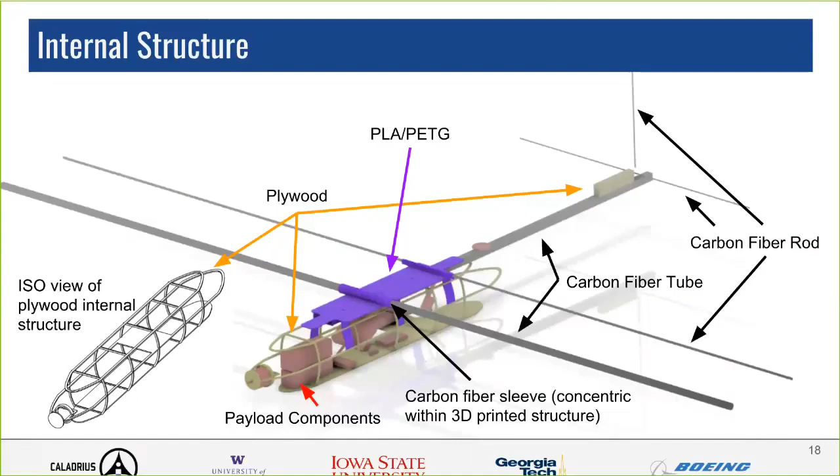Well, that was fast.

Hey guys, just doing a mic check for Team 6 here. This is Richard, can everybody hear me? Loud and clear, thanks Phil. Hi everyone, this is Tom Flipson from the University of Washington, I'd also like to do a mic check, can everyone hear me? Yep. All right, people can hear Iowa State. Can you see our presentation? You are a little quieter than the other two, but we can see your presentation just fine. Is this better? We're going. Yeah, that's great, thank you.

Good morning everyone, we are Team 6, MARTI, and this is our critical design review.

We'll start by going over our mission statement, examining the mission stakeholders and the description of the mission, as well as some of the parameters we've designed. Our UAV, MARTI McFly, will be flying into extreme storms to collect weather data in order to improve tornado prediction. We'll be doing this using dropsondes that the National Center for Atmospheric Research has graciously donated to our cause.

Some of the stakeholders for our mission are Dr. Robin Tanamachi from Purdue. She's a professor in the Department of Earth Sciences and researches severe storms and tornadoes, and has been instrumental in helping us determine the types of conditions we'll be flying in. We've also been working with Dr. Holger Vömel and Dr. Terry Hock from NCAR, scientists who operate and design the dropsondes to collect the data and then analyze the results.

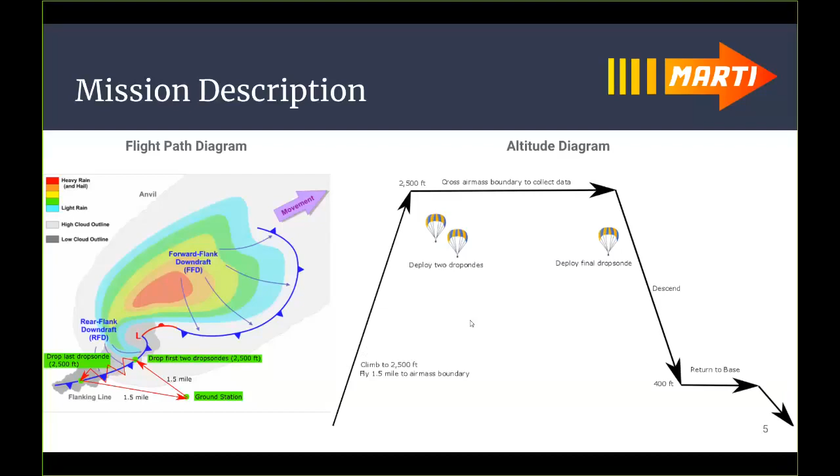Our altitude diagram shows that we'll be ascending to about 2,500 feet as we approach the storm. Once we enter the storm front, we'll be dropping the first 2 dropsondes, crossing the air mass to collect data with the last dropsonde. Once we exit the storm front, we'll drop that final dropsonde, descend to 400 feet, and return to base.

Some of the parameters and requirements we've come up with are that our UAV shall fly about an 8-mile range. It'll cruise at 67 miles an hour with dash speeds of 88 miles an hour, reach 2,500 feet above ground level for max altitude, be able to carry and deploy the 3 dropsondes you see at the bottom, and tolerate any gusts, hail, and water it might encounter in the storm. Finally, it will be hand launchable.

Some of our design overview features: we have removable wings for easy transport, since this will be traveling with storm chasers. We have a cantilevered tail boom for structural support, and our components tray, which holds all of our interior components, is fixed to that boom. Our dropsonde deployment feature sits on the bottom of the fuselage and is able to deploy the dropsondes NCAR has gifted us, which you see on the bottom right. These are operational and will be able to transmit data to us.

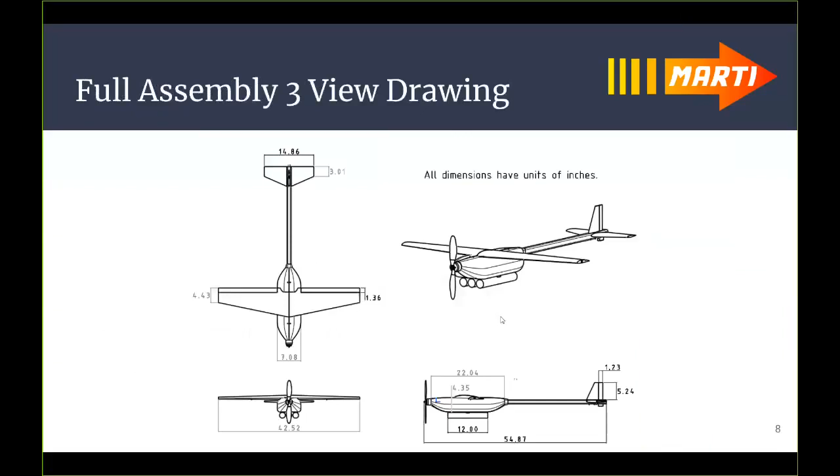This is our full assembly. All of the units here are in inches, and you see that we have about a 3.5-foot wingspan and about 4.5 feet from nose to tail.

Team work breakdown is pretty similar to PDR, although a couple things have changed. Pengwei is still our coach here at Iowa State. Brenton and Steven are our program managers and chief engineers. Anwar is also assisting, and our team has expanded to include 6 sub-teams now. We've added a payload team, and the students have been redistributed accordingly.

So now I'll transfer it over to Tom and Marcello at University of Washington to discuss propulsion.

Good morning everyone, my name is Tom Flipson, and I'm a student at the University of Washington. Today I'm going to discuss with you our propulsion design requirements, our design selections and performance for propulsion, and the subsystem validation and testing.

The propulsion design requirements for our system: we must provide enough thrust to overcome the drag the aircraft will be subjected to at 67 miles an hour of cruise, with surplus thrust available to overcome drag at 88 miles an hour for a short duration.

Our battery system must also provide enough energy to allow the aircraft to fly a mission range of 8 miles. The estimates of this requirement will be validated by measuring power consumption at various dynamic pressures. On the right, we've written validation of those requirements: our propulsion system must provide particular amounts of thrust at dynamic pressures corresponding to 67 miles an hour and 88 miles an hour, as well as provide 8 pounds of static thrust. We'll also be checking the power requirements.

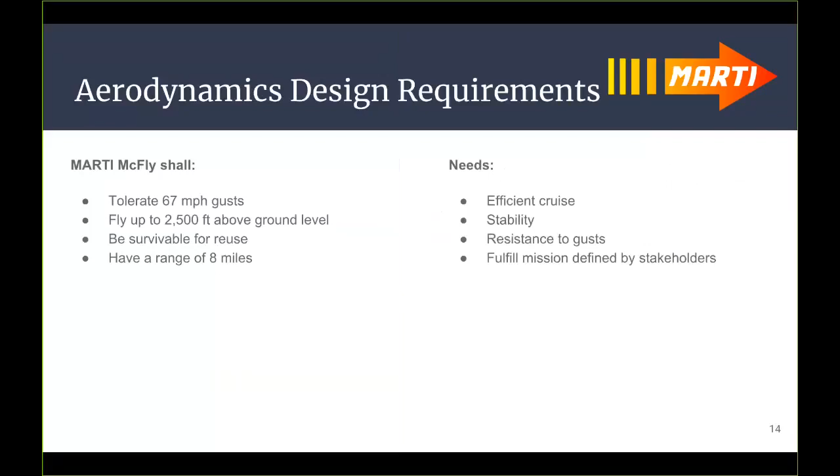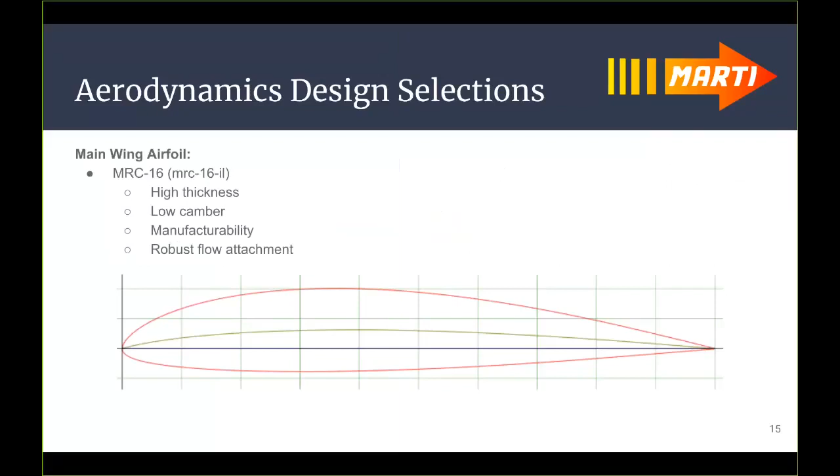The next few slides are our wing selections. For the main wing, we went with an MRC-16. The high thickness allows for sufficient lift and to embed our servos, while the low camber provides an acceptable pressure gradient to keep flow attached.

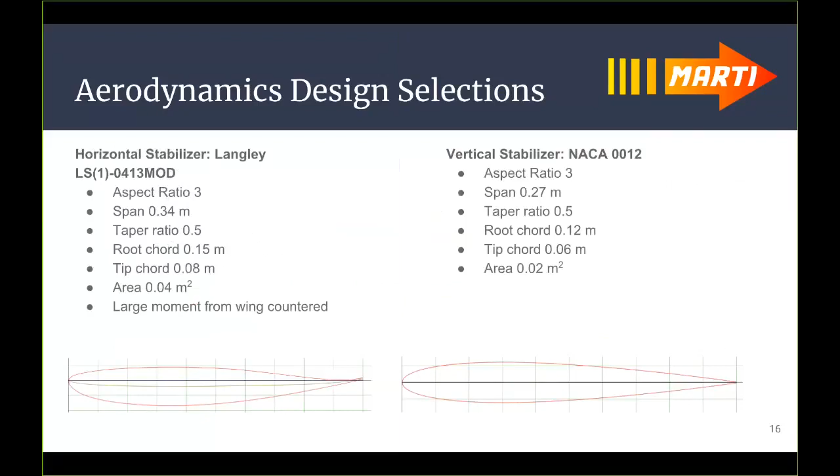These two airfoils shown are the vertical and horizontal stabilizers. What's important to take out of this is that since we have a large moment from our main wing, we needed to size the airfoils in the rear of the aircraft to counteract that.

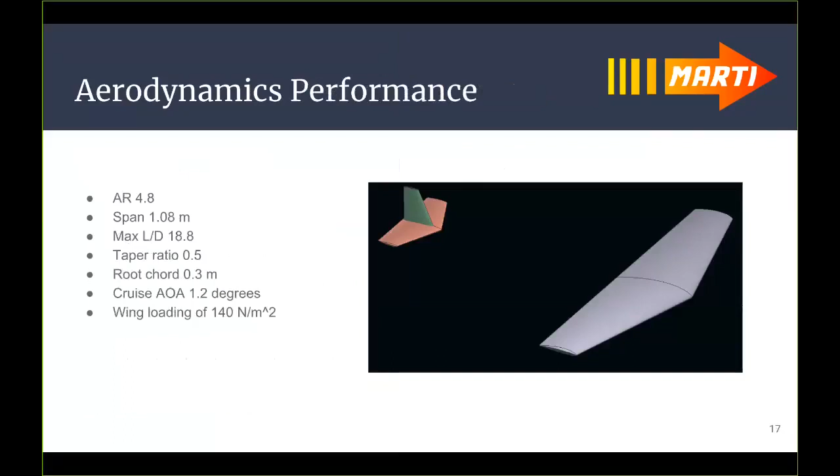For performance, we're going to be mounting at a 1.2 degree incidence angle, and we're expecting a wing loading of 140 newtons per meter squared during cruise, with a max load of 12 Gs beyond that.

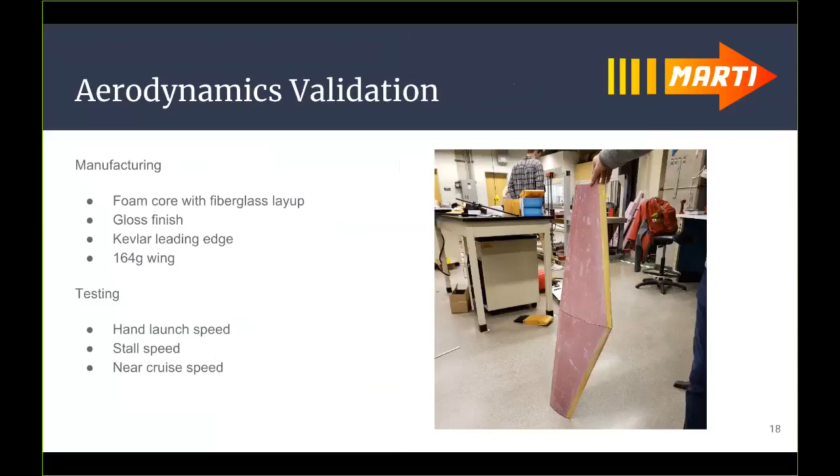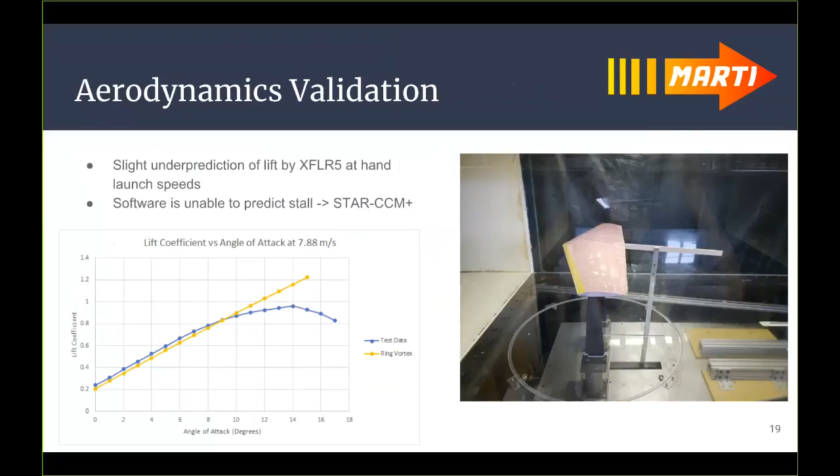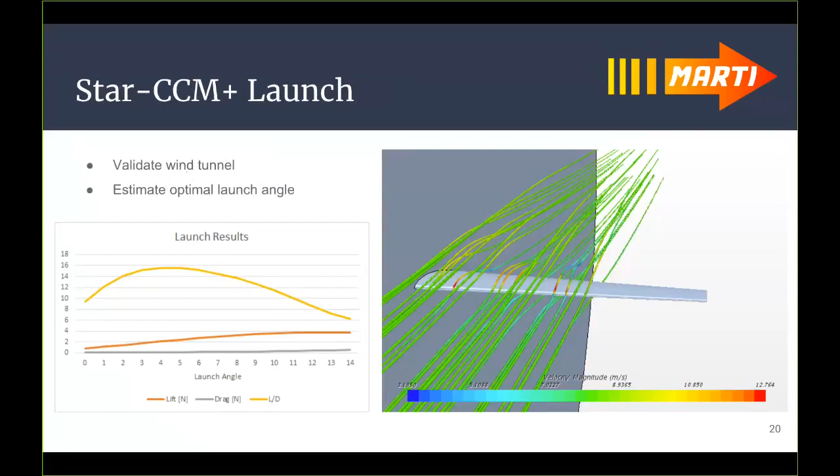Since we were confident and satisfied with how our wind tunnel data matched up with our software validation, we're going to use Star-CCM to validate our cruise configuration. This will allow us to save time without having to go to the wind tunnel, and to change our angle of incidence much easier to hone in on the appropriate value.

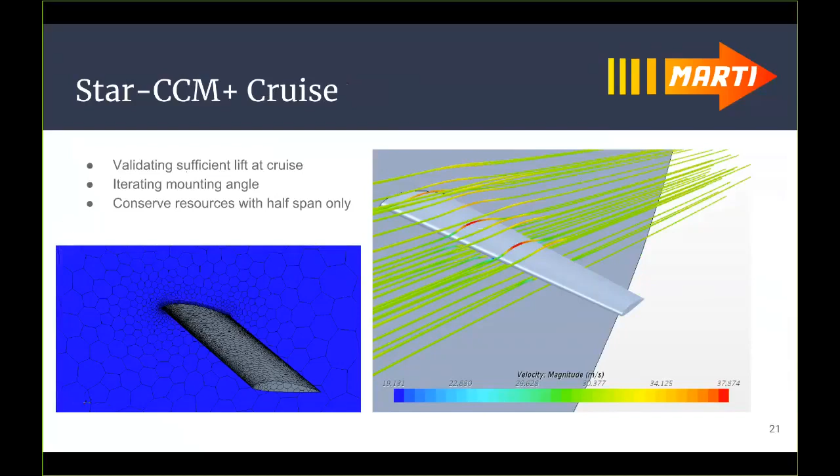The next few slides are our control selections, and again, we'll go over design requirements, selections, performance, and our validation plan.

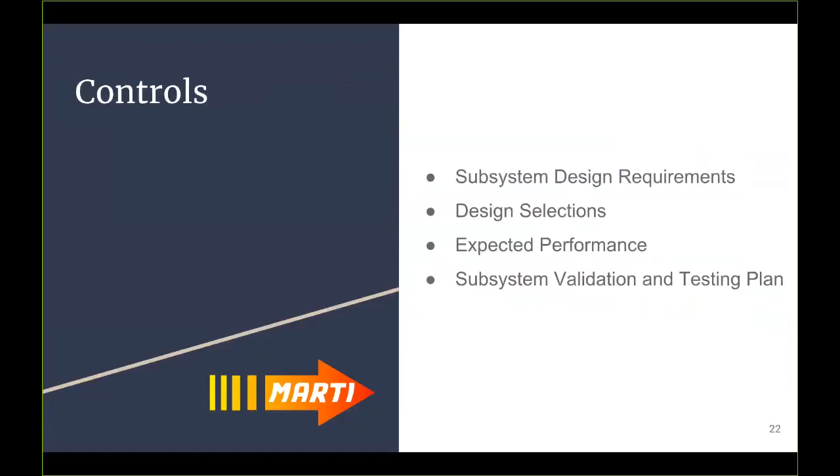So for an aircraft that's going to be flying near tornadoes, we need high stability and control authority. It needs to be durable. We need to be able to operate in varying speeds, which is the cruise and dash speeds we talked about earlier, and we need extra lift for takeoff.

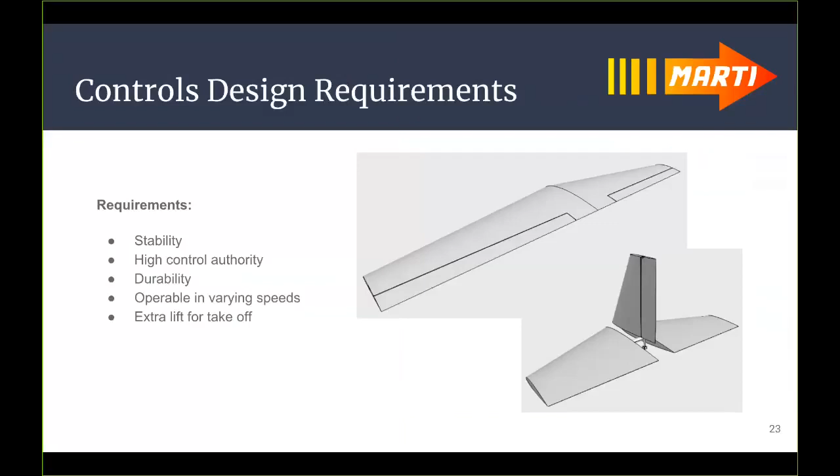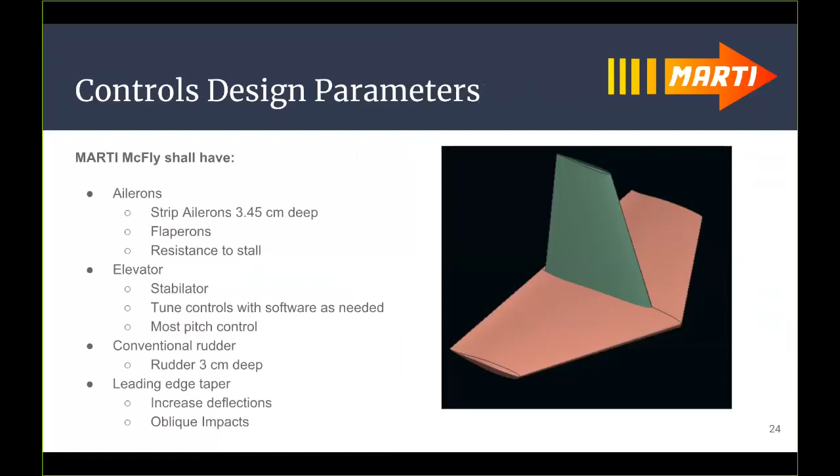So to achieve that, for high control authority, we're going to be using strip ailerons, which run the length of the wing. We're going to have a flaperon configuration so that we can improve our stall speed. The elevator is going to be a stabilator to counteract the large moment from our main wing. And we're going with a conventional rudder with a leading edge taper.

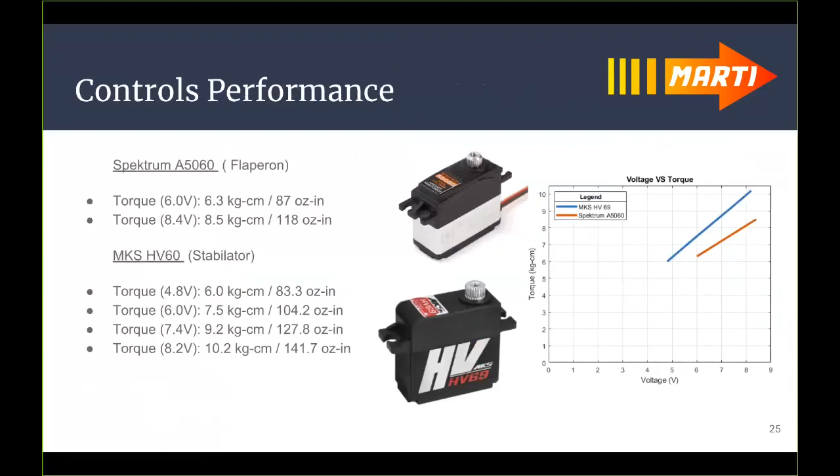Because we are expecting high loads on our wing surfaces, we're going with high torque servos. For the flaperon, we're using 2 Spektrum A5060s, and for the stabilator, we're going with the MKS HV60. The graph on the right just shows what our expected torque is going to be per applied voltage.

And I'm going to pass it over to Richard to talk about structures.

Yeah, thanks, Marcel. As I said, my name is Richard. I'm going to cover the structures stuff for you today, and then a little bit on how everything's going to integrate. So for structures, we're going to talk about the requirements again, the selections we made, and then some validation analysis of that.

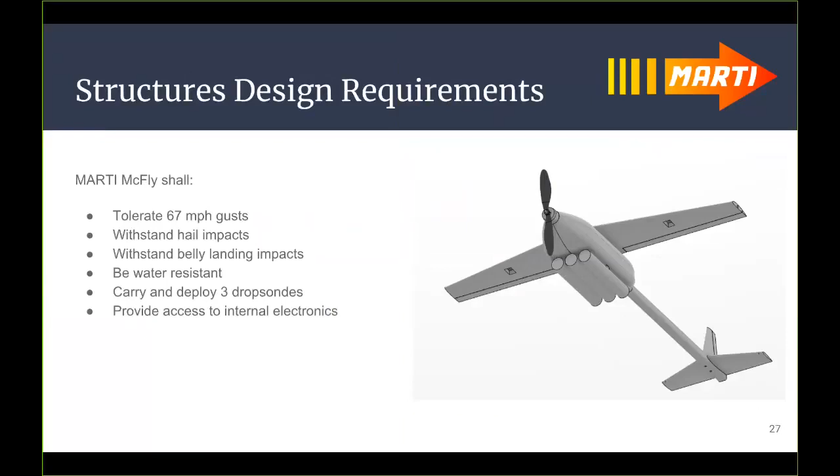The requirements were: we need to tolerate 67 mile per hour gusts, that's about 30 meters per second. We need to withstand hail impacts — obviously, if we're going into these big storms, that's a concern. We need to be able to withstand belly landing impacts, that's how we plan to get to the ground. Be water resistant, obviously to rain. Carry and deploy 3 dropsondes, that's the payload we talked about. And then to provide access to the internal electronics, if we're hot swapping batteries, we have to have reasonably easy access to get in there.

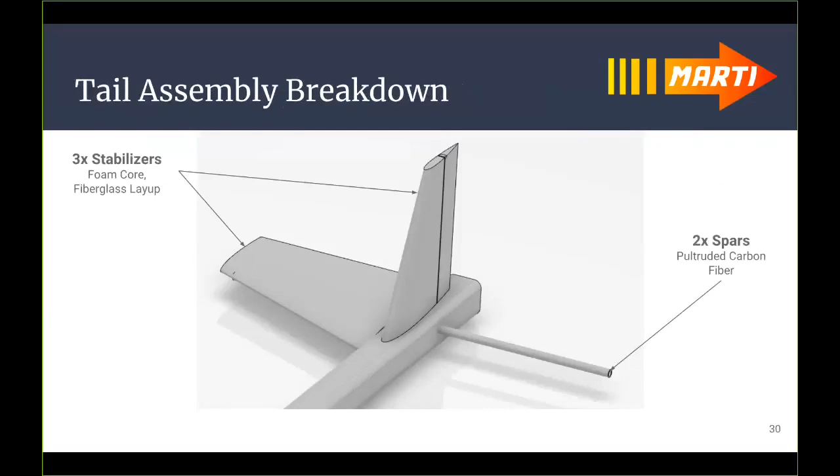Tail assembly in similar fashion. We have the stabilator, has a spar going through on either side, and then the vertical stabilizer. These are all once again going to be foam core construction, and then with a fiberglass or carbon fiber layup on top.

A little bit of systems integration, so just how all the components are going to work with each other, and then a talk on some power systems or other electronic systems components and the power budget for those.

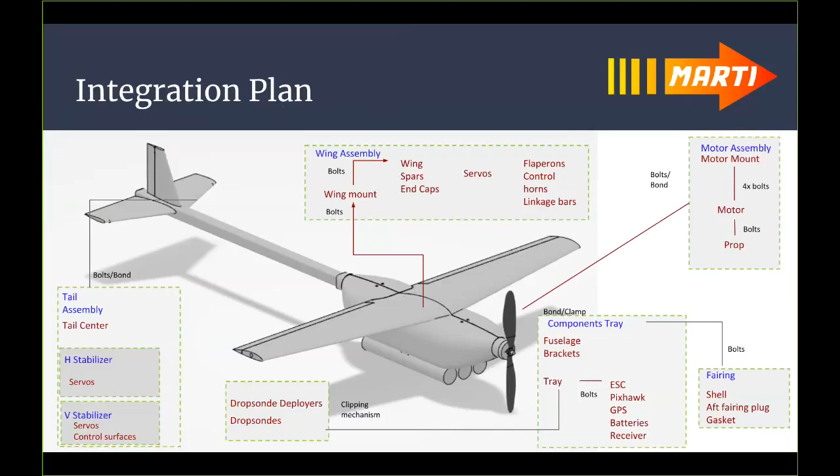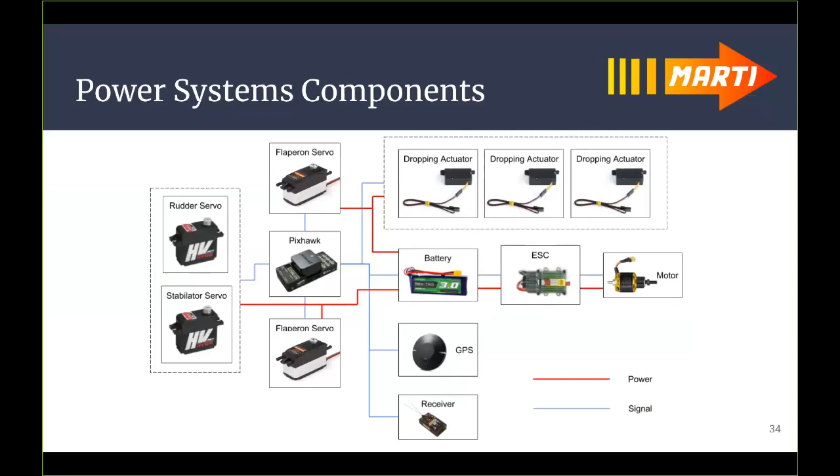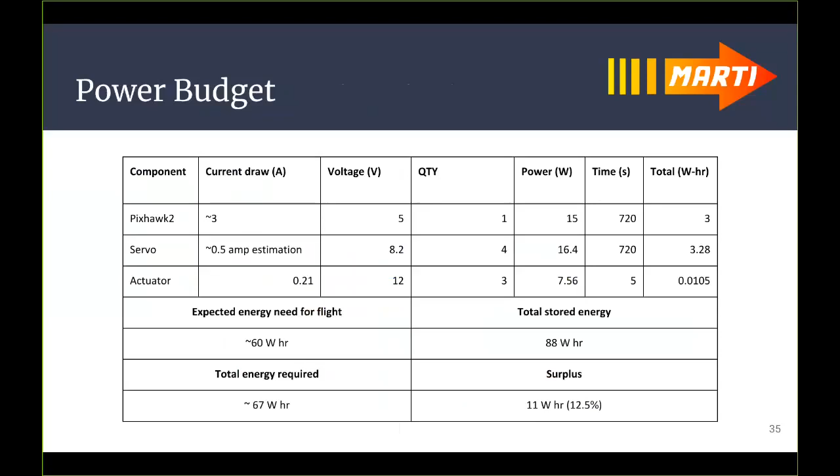All right, I'm now going to pass it over to Becca to talk about further validation.

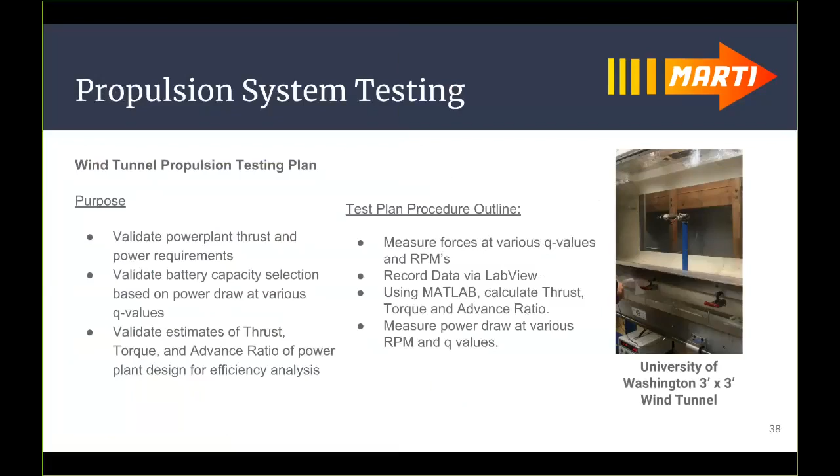For flight tests, we have 4 weeks of flight testing planned. The first week we'll be investigating glide, stall, and cruise conditions for the aircraft. Week 2 we'll move into investigating dash velocity, climb rate, and then range and endurance for the aircraft. Week 3 we'll be looking at payload deployment, both high speed and slow speed deployment based on the various flight conditions we might encounter. And then week 4, our contingency testing, we'll be looking at loss of signal as well as full control deployments.

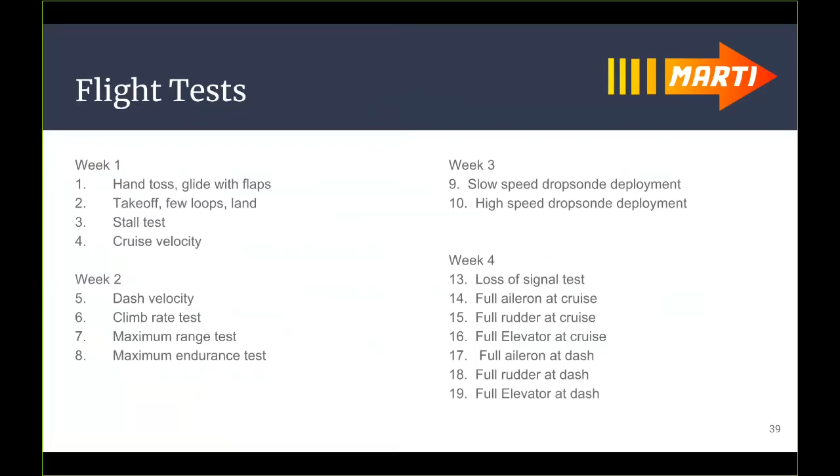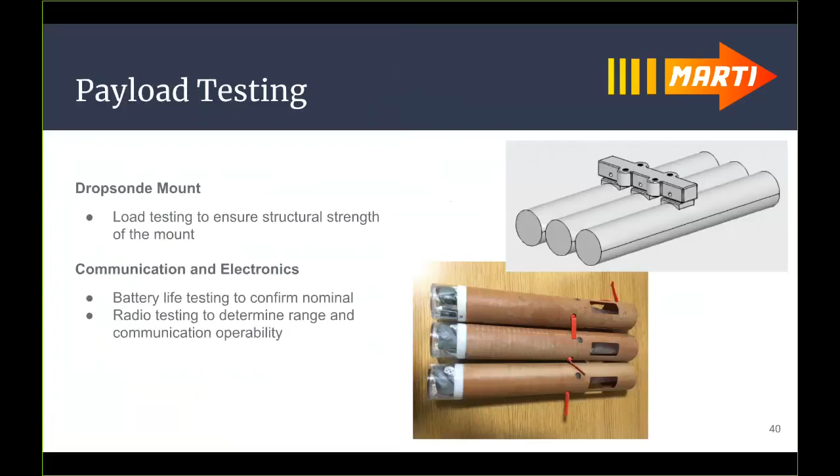For our payload testing, we'll be doing structural integrity testing on that dropsonde mount that you see in the top right, so we'll make sure that can withstand any kind of loading it might encounter during flight. And then we'll also be looking at battery life and radio range for the dropsondes you see below. These have internal batteries, so we'll just be making sure those have the life to last for the whole flight.

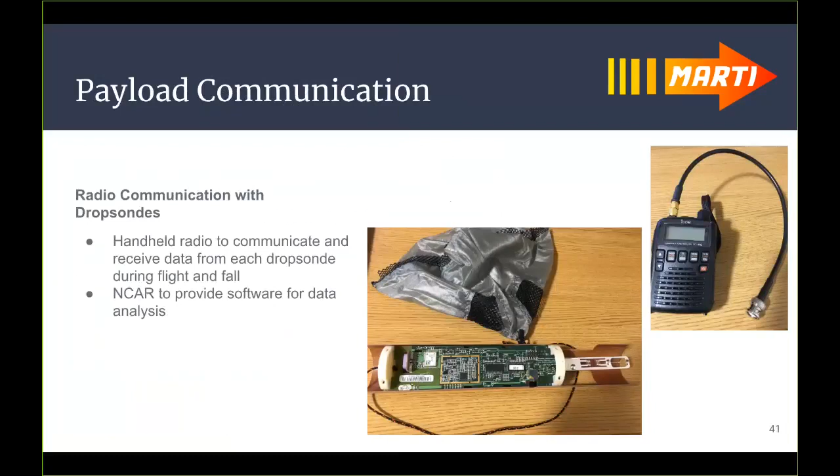For payload communication, each dropsonde is connected to one of these handheld radios that will be receiving data, and we'll be working with NCAR to help us put those in communication, and then also with software providing for that data analysis. And I'm going to give it over to Brenton to talk about manufacturing.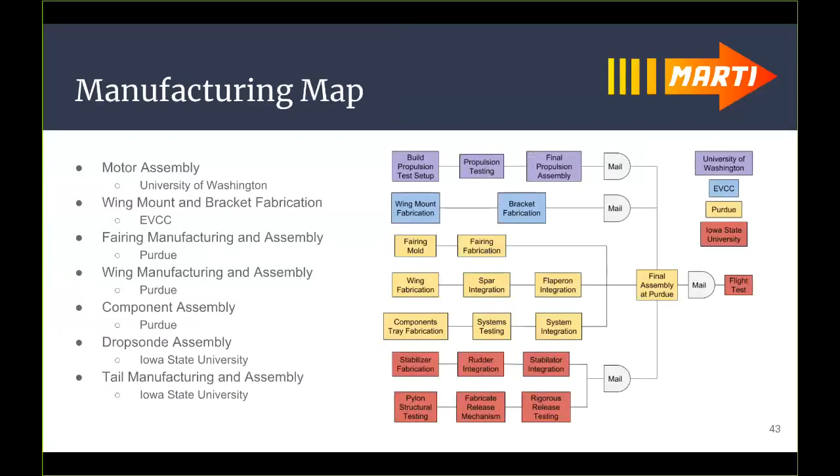For our manufacturing sample plan, this is just an example of our bracket used to hook the tray to the tail boom. You can see we've outlined where it's going to be sent, the cost, possible materials, tools required, 3-view drawings that can be given to the manufacturer for fabrication, as well as a procedure for how to use it and the intended use.

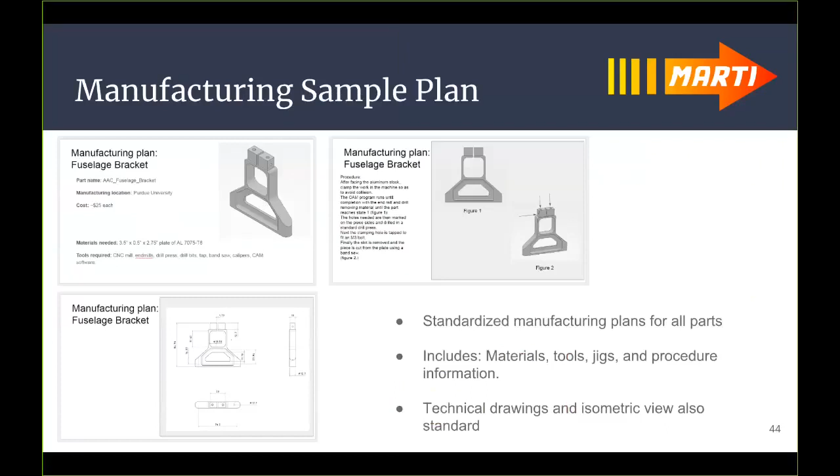For jigs and tooling, throughout this process we'll be using quite a few different fabrication tools. At Iowa State, when we produce wings or our tail assembly, we do it using Mastercam and a CNC. In the image it shows creating a negative mold for the underside of the wing section so that we can correctly CNC the top part. We will also be using 3D printing.

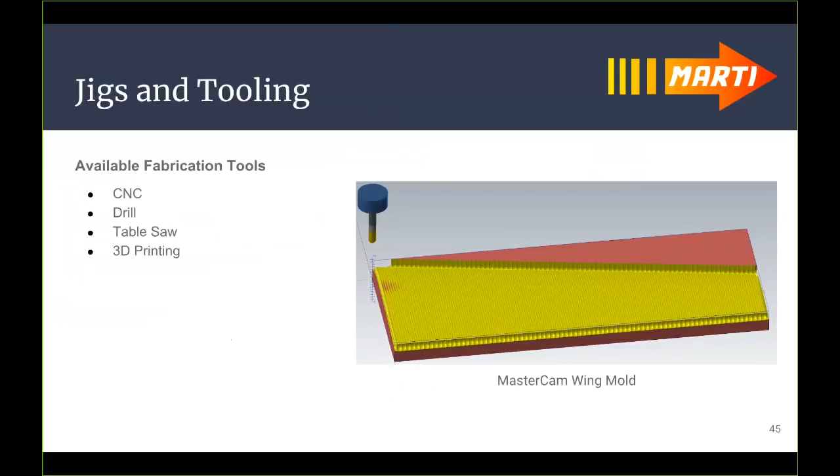So for the manufacturing timeline, I'd like to draw attention to the legend. The building time takes place in the black areas, the shipping time takes place in the gray area, and the testing in the yellow. For example, the dropsonde assembly will be testing some of our components and then building our final assembly before testing it again and making sure everything works well before shipping it off to the main assembly.

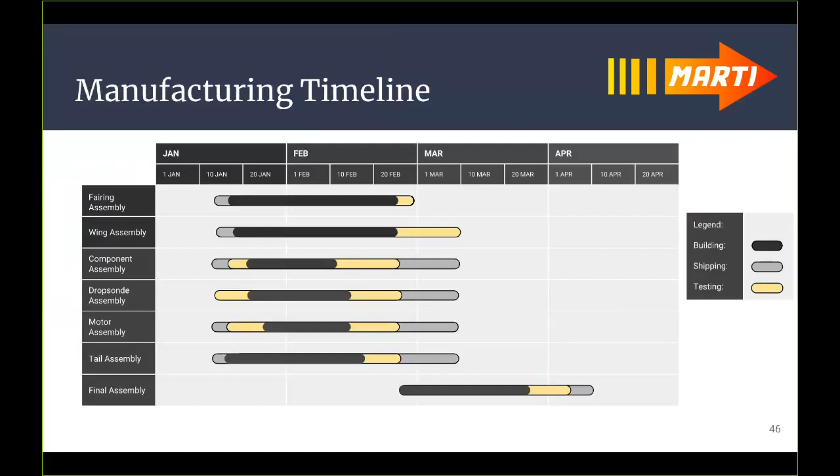Throughout this, we have our project management. We'll be outlining our updated budget as well as the Phase D schedule.

So for budget, as you can see from the pie chart, we still have quite a bit of a remainder left over. Our total project cost is about $3,878. We have accounted for the shipping expenses in there. Our payload is a very small amount of our overall budget due to the generosity of NCAR providing the dropsondes. We won't actually have to purchase those.

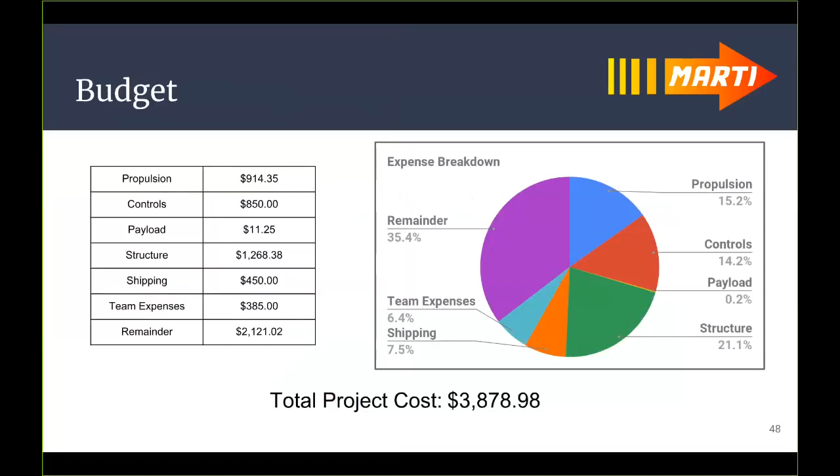So for the Phase D schedule, this is just kind of to go hand in hand with the manufacturing plan. As you can see, all of the fabrication and testing are integrated here, as well as some other things that don't fit directly into the manufacturing plan.

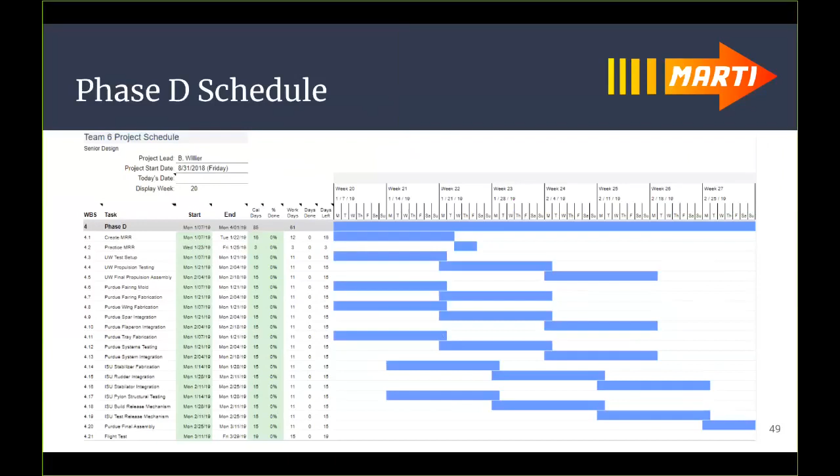So thank you for listening, and we'll open up for questions.

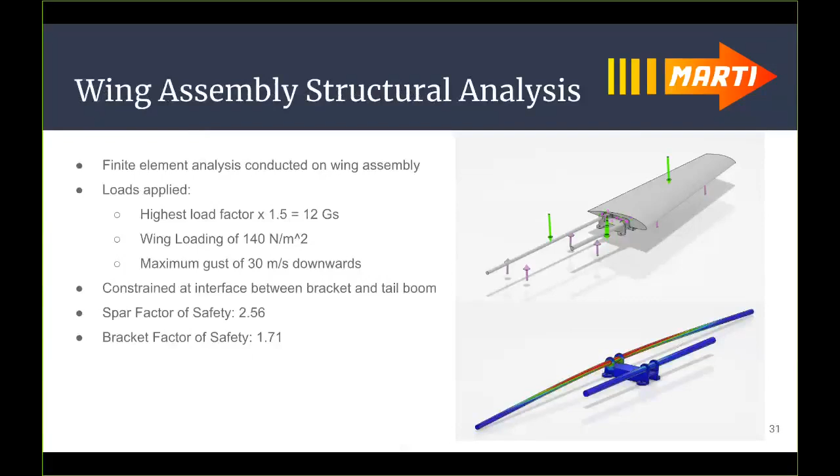Looking at your attachment brackets between the tail boom and the wing mount. I'm not sure exactly which slide that is. You scroll back where you're showing the fuselage attachment, wing attachment to the fuselage. Kind of an image of the one you're referring to? Yeah, if you go further up, there is a better one. Yeah, you just passed it.

Okay, that one. For the intents and purposes of this model, this is an adequate design, it provides you flexibility and adjustments. However, if you would design a wing to fuselage joint like this in Boeing, you would receive a lot of constructive criticism. Generally, you're trying to avoid putting your bolts in tension. Your fasteners are way more efficient if they're loaded in shear. So this is something to consider, just a word of advice.

Excellent, thank you for that. Yeah, we'll work on the right thing. I think it will do just fine for what you need, but what I'm saying is this is just looking forward.

One other thing is you have pultruded carbon fiber spars. I would consider putting a very thin wall metal sleeve in the areas where the parting plane is between your fuselage attachment and the wing, and the same at your tail, horizontal tail attachment to the fuselage. As I mentioned before, carbon fiber doesn't like to be point loaded transverse to the fiber direction. It's pretty sensitive to that out-of-plane loading, so you may want to have something to protect that immediate area.

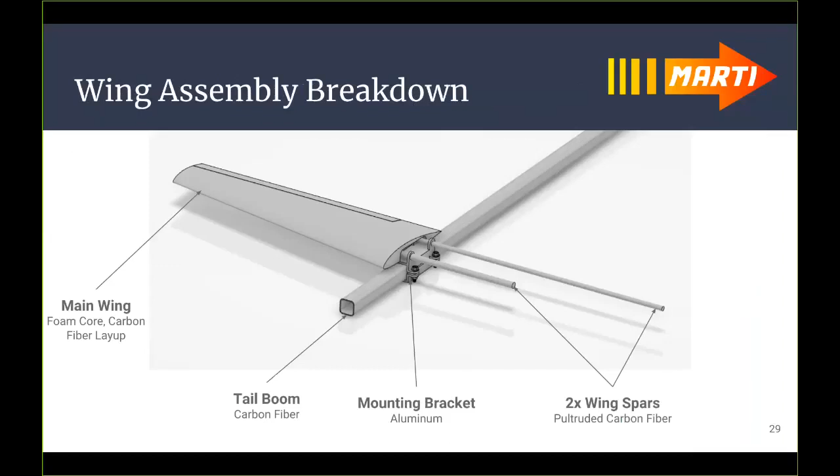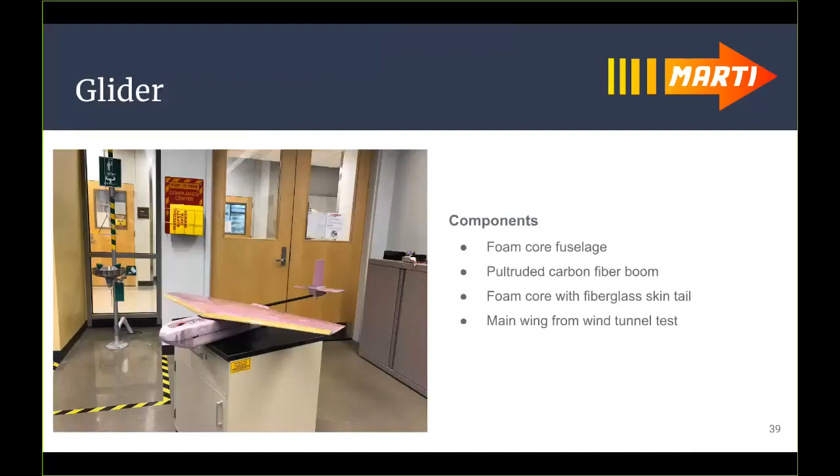I'll pitch one your way. I believe early in the presentation, like slide 6, so kind of your initial view. Just kind of... that would work as well. Just kind of anything that shows the entire aircraft as you currently have the design.

If I would look at that, I would say it would be impossible to get your CG where you want it.

That being said, I think there were some points later in the presentation where the location of the wing looks more reasonable, although it's not on your three view. I just would like to warn you urgently about that. We've had groups do that before, and you can't put enough weight in the front to try to get your CG where you want it.

Did you have a CG breakdown somewhere? I don't know that you did. No, we didn't bring that forward from the PDR. Okay.

Especially, you show your internal arrangements. Unless your motor is made of like depleted uranium, I don't think there's any way that you can get the CG, but I would love to be proven wrong on that. Proving that would be an excellent thing for this presentation, or at least reminding us.

And then I guess one of my other questions was kind of along what Bronco had said. What is your plan about integrating your spars, or keeping your spars in place either in the wing or in that central box structure? I believe Patrick, you worked with the wing mount and integrating that. Can you speak to that a little bit?

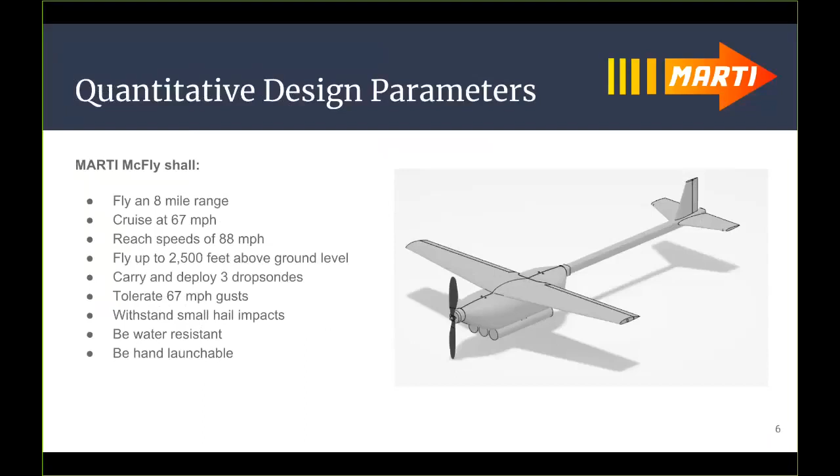What is your sensor release mechanism for the three shells under the body?

Yeah, so as you can see in this image, we're still working on the detailed design of how we're attaching these, but at the bottom of the image, there's three small linear actuators that would release the pin from these 3D printed pylons that are mounted into a kind of square mold at the bottom. That way we can avoid any heel toeing from any gust that might come onto the dropsondes.

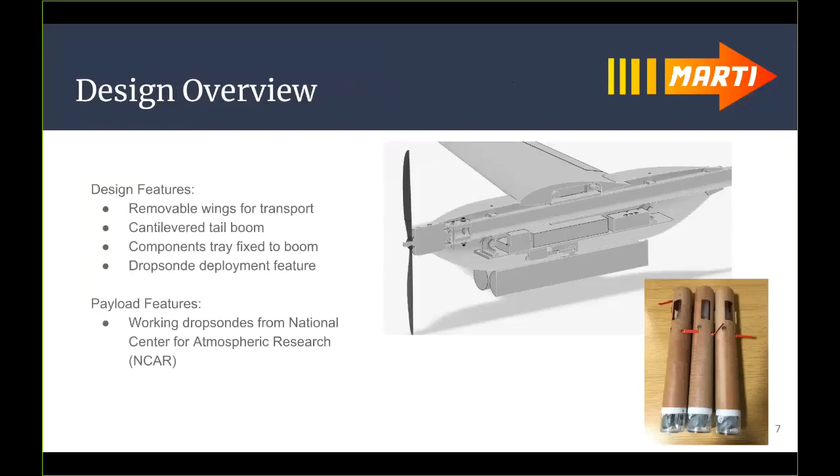And then I know Becca spoke with NCAR a little bit more about this, and they said our plan was to epoxy these small pylons into the center of the dropsondes, and NCAR doesn't see any issue with doing that out in the field.

Yeah, there's a little bit clearer image of our dropsonde assembly.

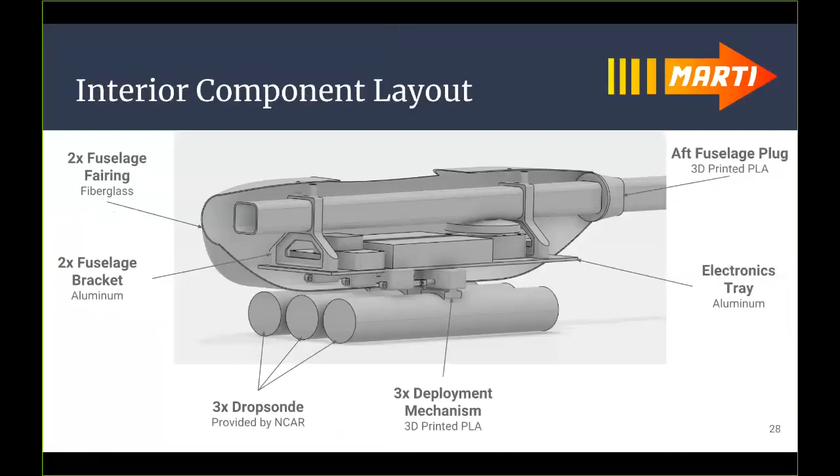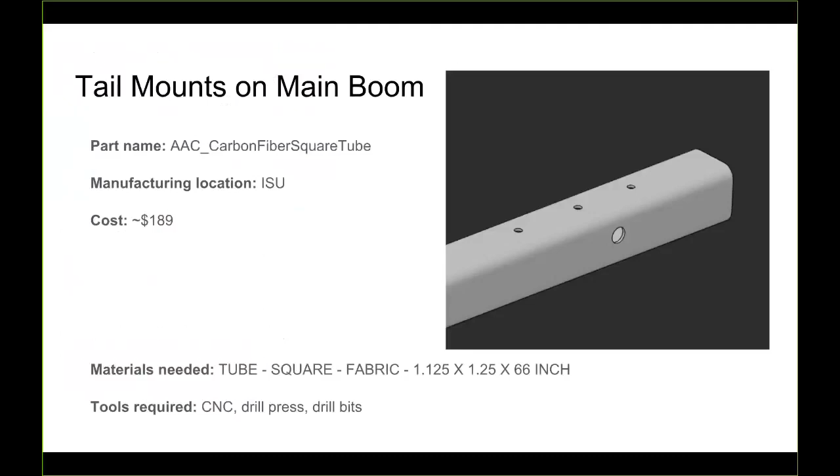Anything else? Just a little comment. You just passed this two slides before, your mounting plate for that one. You have mounts at each end, and then you have some equipment mounted in the middle.

It's a relatively thin sheet metal part. Make sure you have enough bending capabilities. Yeah, some FEA will have to be done on this to ensure that the mounting.

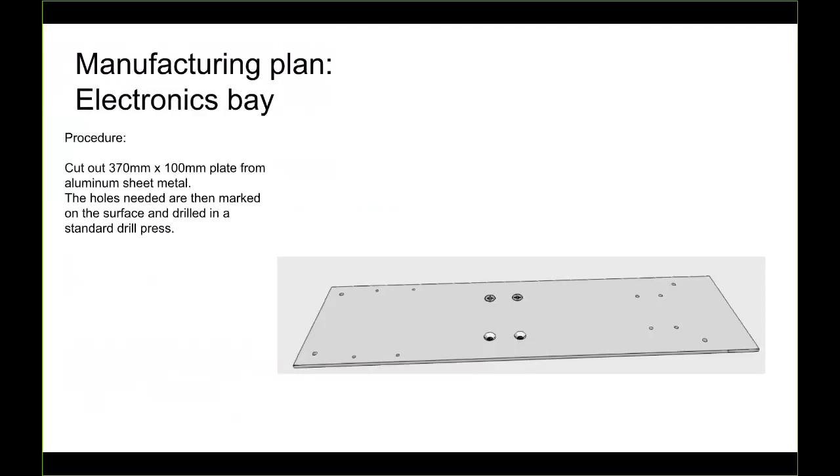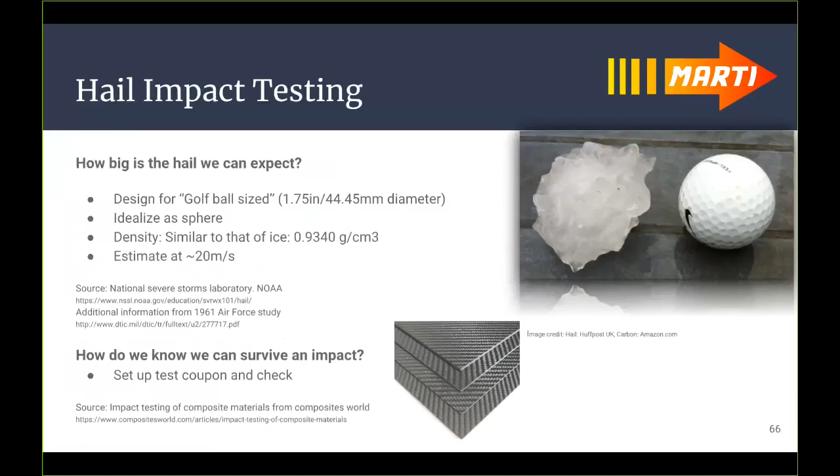My team, who is suspiciously absent from...